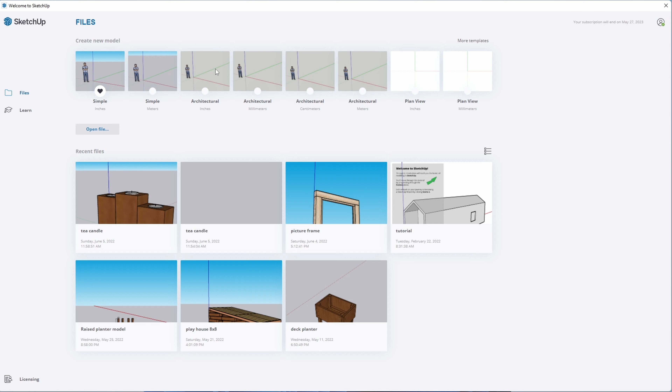The first thing I'm going to do is delete this creepy guy. Today we're going to be drawing a porch pot planter.

I think I'm going to start with a 2x2 leg. This material in this build will be a rough material, so full dimension. Once you draw the leg, use P to extrude it upwards. I'm going to do mine about 16 inches.

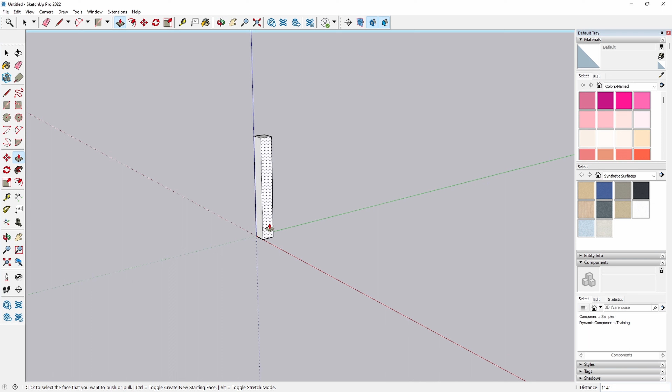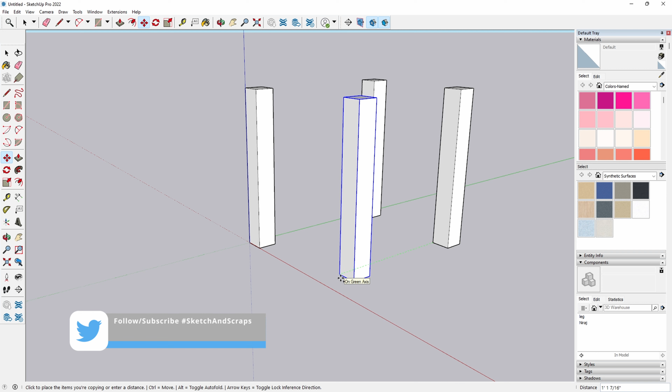I will make my legs a component because I want each of them to be moved in the exact same method if I end up tweaking them going through my build. To move an object and copy it, hit the Control key while moving it. If you hold Shift to tie it to an axis and use your pointer to reference another point, it's a lot easier to lock pieces into the proper place.

Now let's check our measurements, find out what we're dealing with. I think I'm going to try a 12-inch board here. We might adjust this because it might be a little bit too big, but let's see what it lays out. Use P again to extrude it.

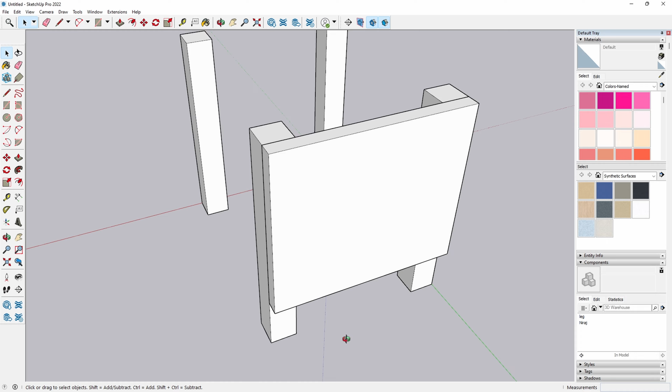For now, I think I'm just going to group it so that way I can move it without sticking to other pieces as I draw.

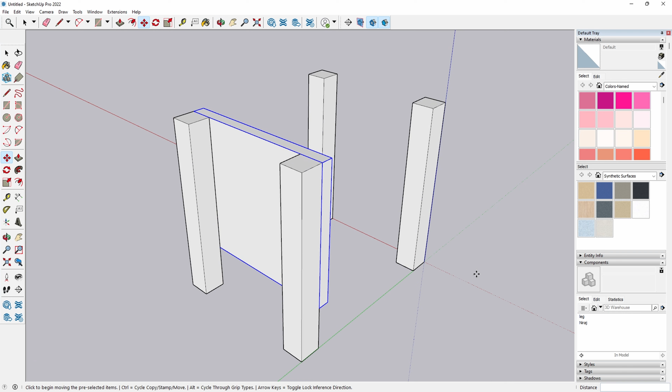Always try to make sure you're rotating on the correct axis. I've had too many situations where I ended up wanting to rotate left and right and I end up rotating it vertical.

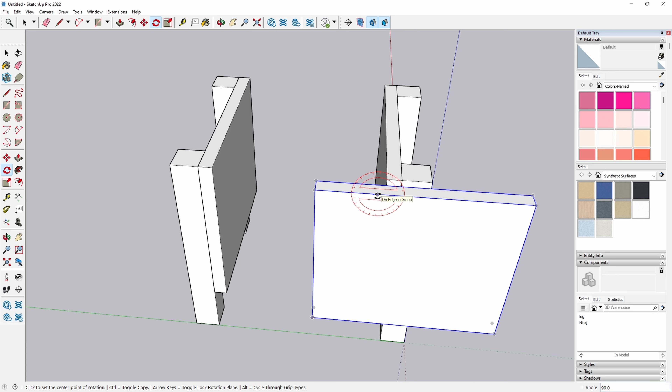Now we're going to pull this out to the edge here, double click inside of our group to get inside, and then fasten it to the outer edge. Control copy.

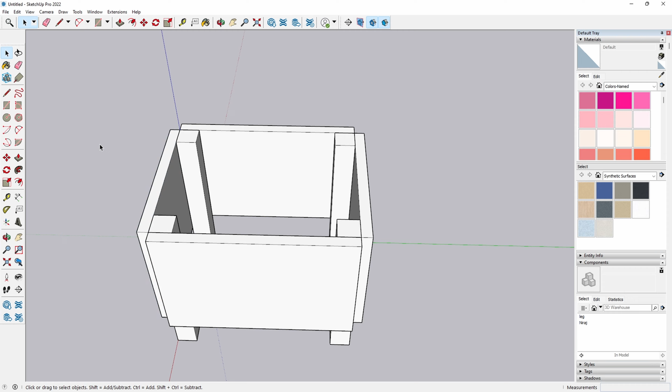These sides are a little too long. Let's go to something shorter. About 8 inches. That looks fine.

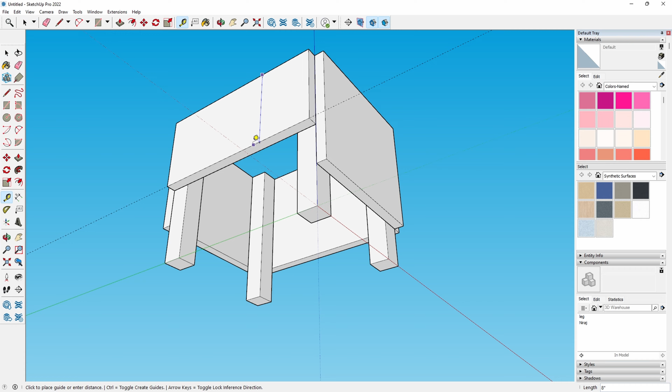Now we just need to modify each of them up. We'll just snap it to the other side here.

Yeah, I really need a trim or something here in the corner. It doesn't look good. It looks just like a box, and we don't really want that.

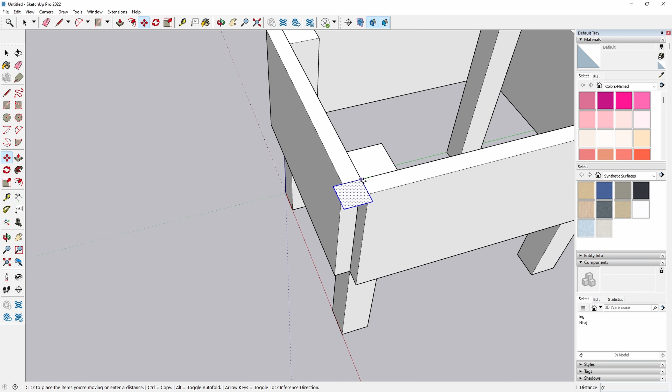So we're going to draw a 1.5 by 1.5 inch piece here. Let's move it out here, touch it to the corner, and let's extend it downwards. Use P to pull, match it to the bottom.

We're going to go ahead and make this a component. We don't want to be adjusting one on its own. We want to adjust all of them at the same time.

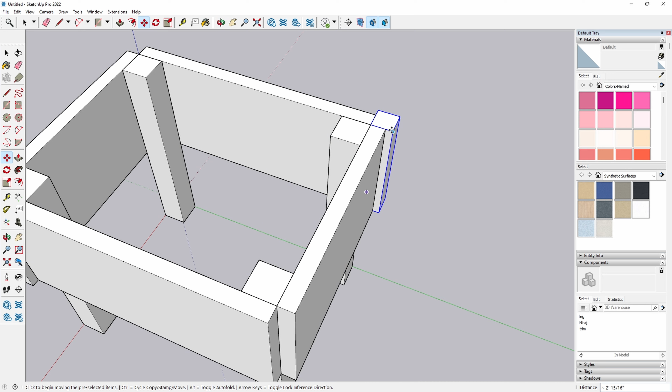So now just copying it around to each point, and yep, oops. Let's do that one again. There we go. And grab the wrong piece.

There we go. That's starting to look like something neat.

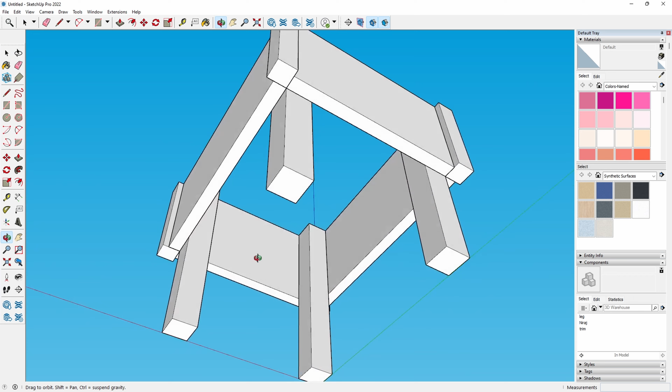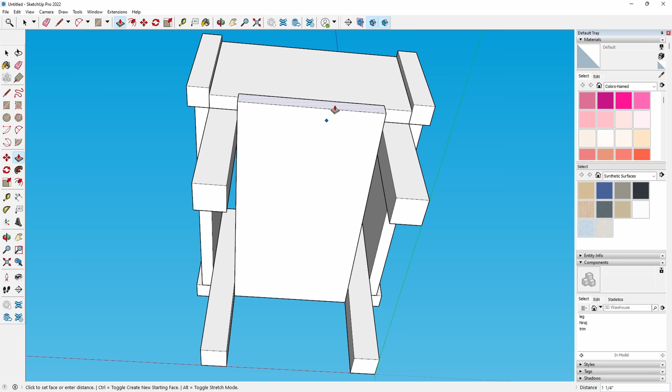Alright, what do we need to put on the bottom here? I think we can do, well, it'll be about an 8-inch wide board if we put it between the legs. I think that's what we'll do here. Just stretch it out and we'll pull it down with 1 1/4 inch, expand it out using extrude. That looks fine to me.

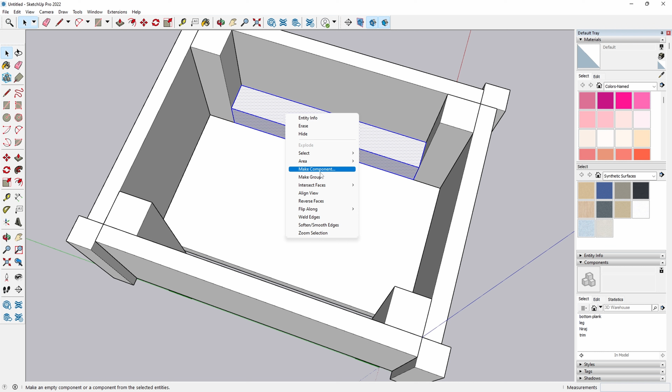2x2, then we're going to pull it out again. So P again, and component that. That's going to be inside trim. And we're just going to snap it horizontally across to the same location.

Alright, so we're going to end up using a tool here a little bit later that'll quantify everything for us, and we need components for all of that. We're going to replace each piece here, but we're going to make a component and then transfer it over.

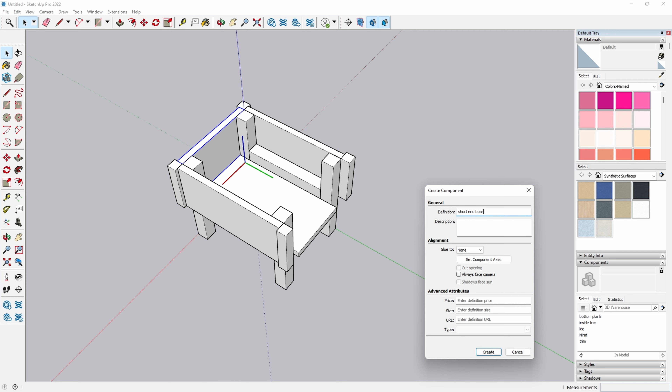So you'll see that right there. And then we're going to be pulling this one over after we component it.

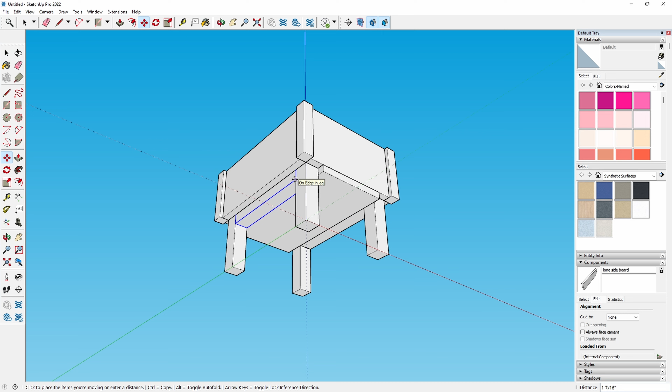I think we need to do something different here. Let's pull these down, make them flush. That looks a little bit better. We got a little lip inside and it looks flush with the bottom there.

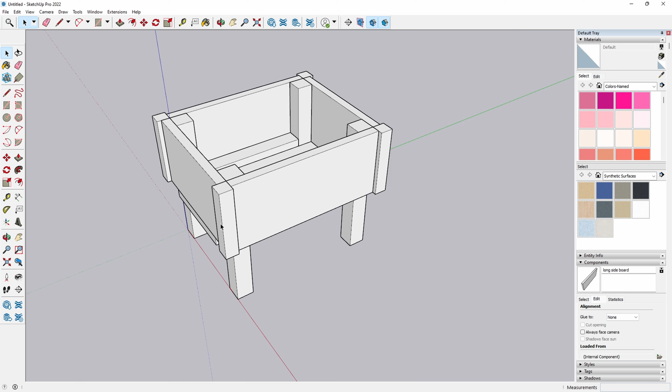Let's color everything up. The best way to do that is just to select everything with a right to left drag, which is going to capture anything it touches. I'm just going to use this Formica countertop material because it's the only thing I found in here that looks kind of nice on these wood grain looking things.

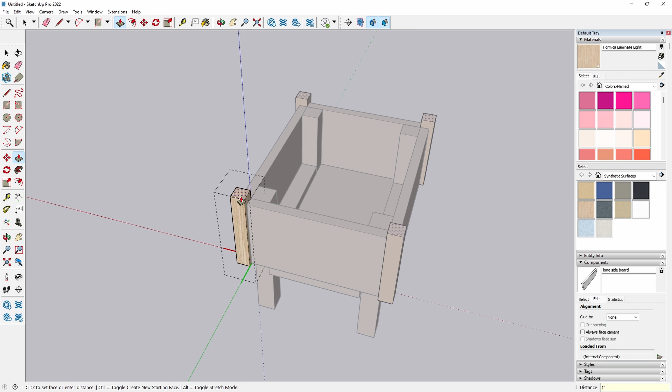So I think these trims on these corners, they need something more. And this is why I make things a component. When I adjust one, it adjusts all of them. I mean, it's square, but it looks a lot nicer, a little bit more depth to it.

Let's see what these look like, heightened and lowered. I think we'll leave those the same.

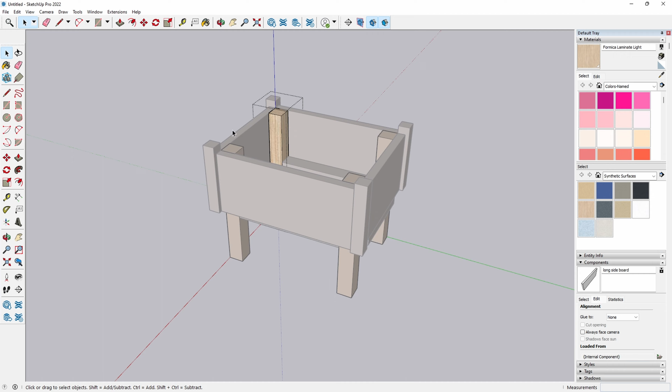Now we're going to add some screws. So I want to look for some wood screws. I will look into the models. You generally have one that other people have made.

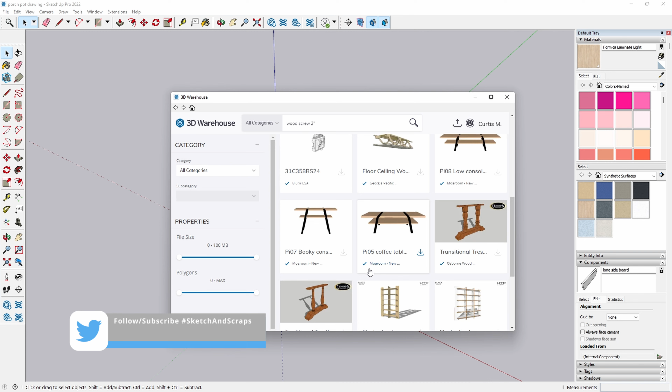Now, something I've found in the past from using these is they're filled with tons of components. And if you want to use them inside of the material cut list, I'm going to explode these so I can get rid of all those components. I'm just going to keep exploding it until there's nothing left but the object that's been drawn.

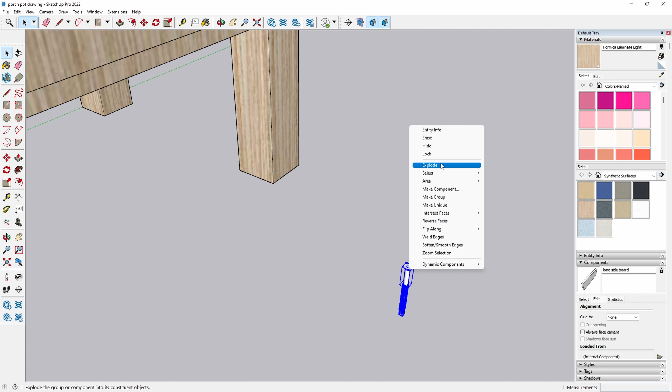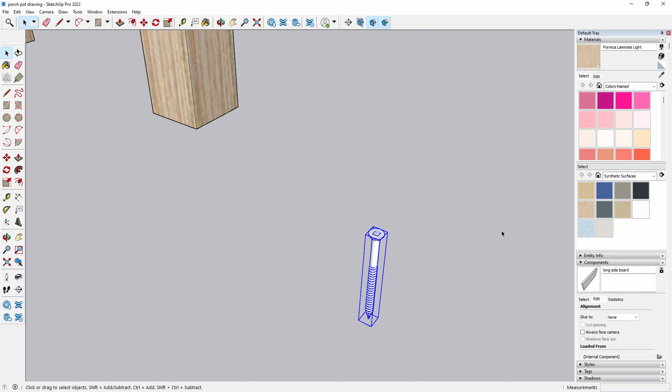When I'm done with that, I'm going to make it a component of its own, so that when I color it, I don't have to individually highlight each piece. I think the reason the individual did that is so this screw could be lengthened and changed into different sizes, which I understand, but for our practice, we just want the one screw in a 2-inch length.

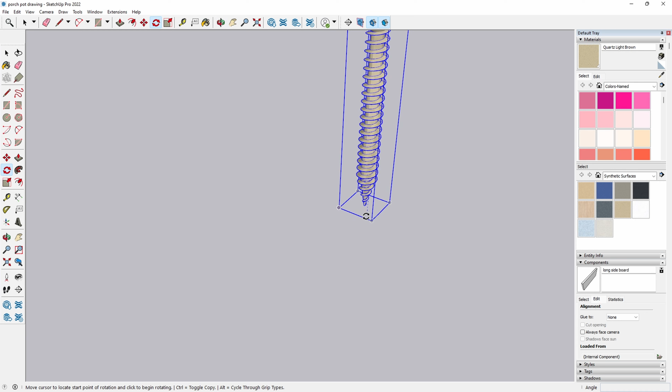So we're going to rotate this, manipulate it, and then put it into our drawing. It's kind of a longer, tedious process, so I'm not going to show you the whole thing. I'll just show you a few key points, and then after that, we'll skip to the next part.

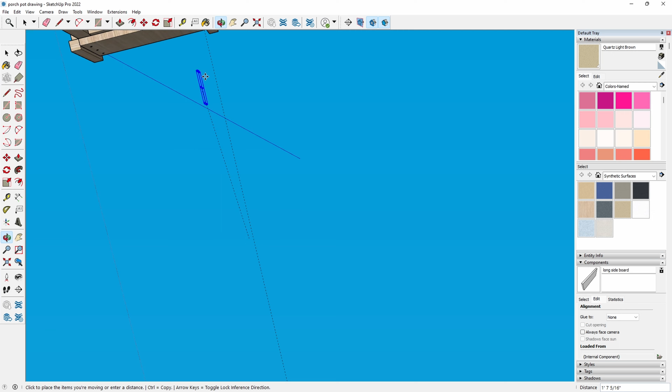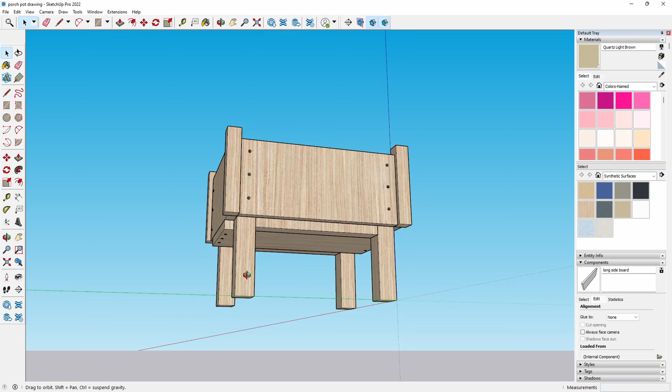So once I have all my screws placed, I'm going to go ahead and do a cut list or a takeoff for this because I kind of want to know what all the pieces are that I've drawn here. The easiest way is, again, highlight everything, go to my materials.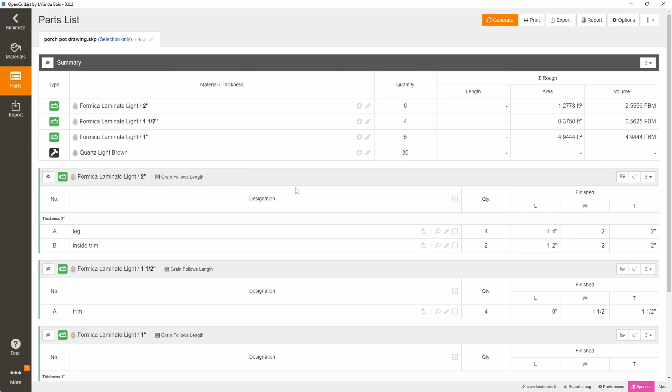Once in the materials, I'm going to select and make sure that this colored object is a hardware. I want it to show up in a hardware list. So now if you notice, I've got legs, inside trim, and my screws have a count of 30. Everything else is very well defined.

Now I will export this and save it, and this is also going to be part that I would share online with you guys. But if you're creating your own models and you want something to go shopping with, or have at your table while you're working on your project, this is a great way to do it.

And that, friends, is the finished product.